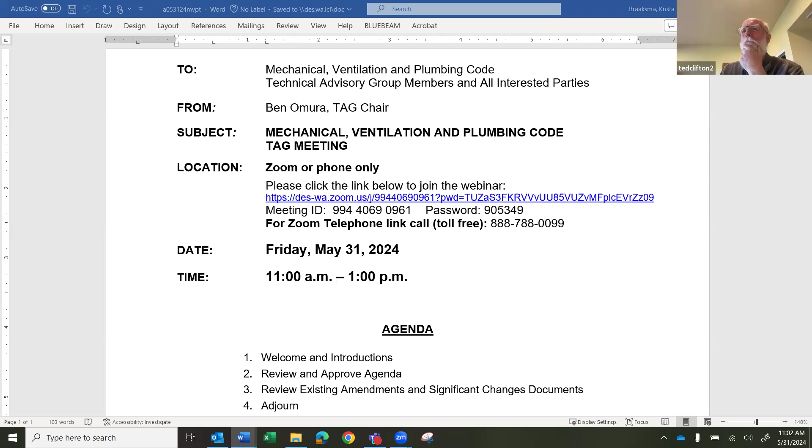Great, thank you. I appreciate you volunteering your time for this, and I think it's going to be super helpful. Just to maybe say it, though it doesn't need to be said, you're representing home builders on the TAG, correct?

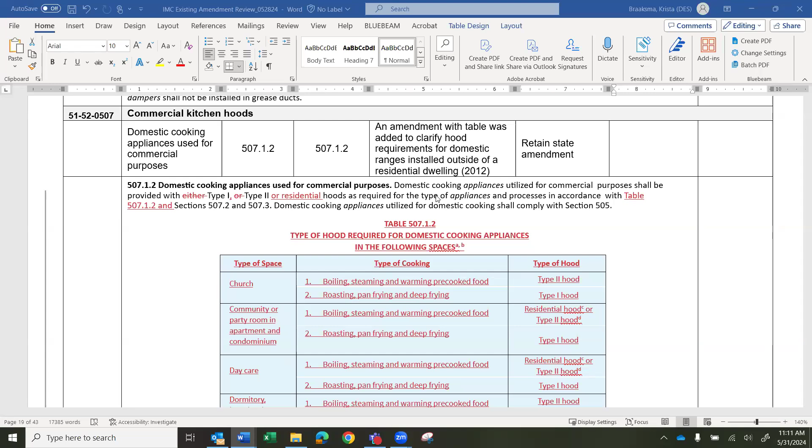Okay, this next one adds a table just specifying what type of hood you would need with a domestic appliance in various occupancies based on what's being done. And yeah, this has been around for a while.

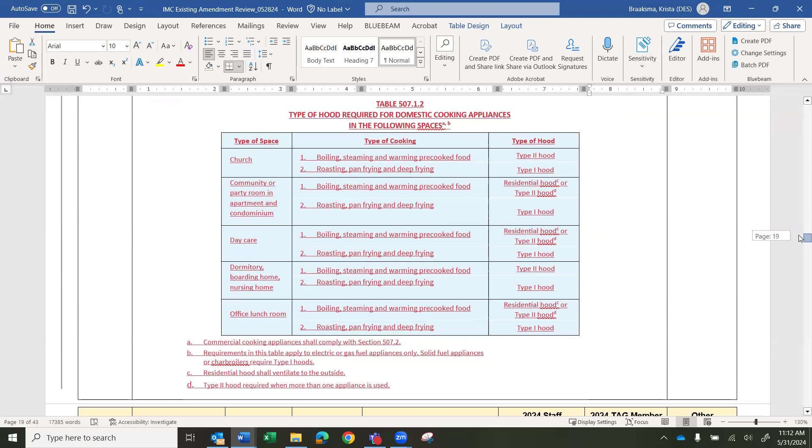Anyone have any items to discuss for this section? Or any other points to discuss for this area or how it's being applied? Is there a clear pathway for defining residential versus commercial, or have I just not seen that? So that we don't get into what is what in the field.

I believe there is, I don't know if anyone has the references off the top of their head, but I believe it's defined somewhere in the section. So you have the domestic cooking appliances defined in section 505, as noted in the last sentence of the paragraph before the table, and that will define domestic cooking and how they're utilized. This is really to define what type of hood is needed for those appliances used in a commercial setting.

And I know this definitely gets weedy. There's also a difference in the capture efficiencies required between a gas and electric, so there's a lot of nuances. Perhaps not so much on the commercial side, but on the residential side, there's also this change in what you need to do for makeup air when you hit 400 CFM, and it could be confusing, I think.

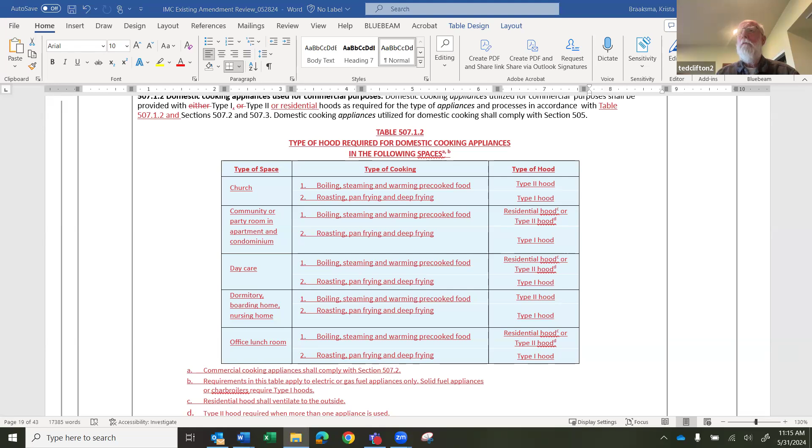Krista, would you be able to pull that section up? Yeah, that's what I'm trying to get to here. Sorry, guys, I didn't mean to take us into the weeds on this. I just know that I've come across that on the residential side regarding capture efficiencies, hood designs, type 1, type 2.

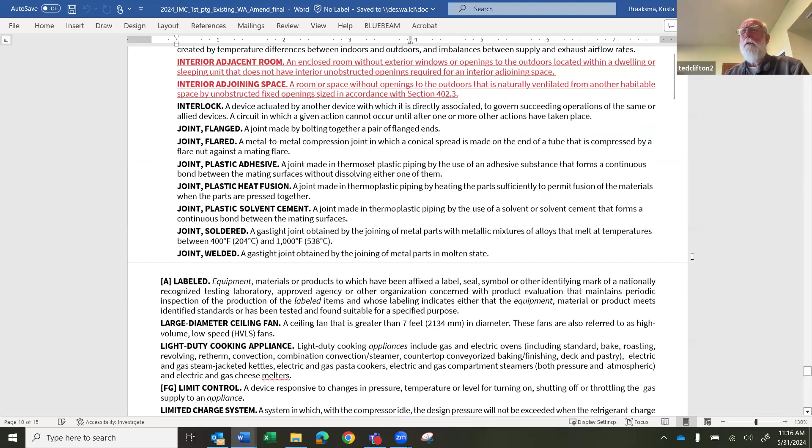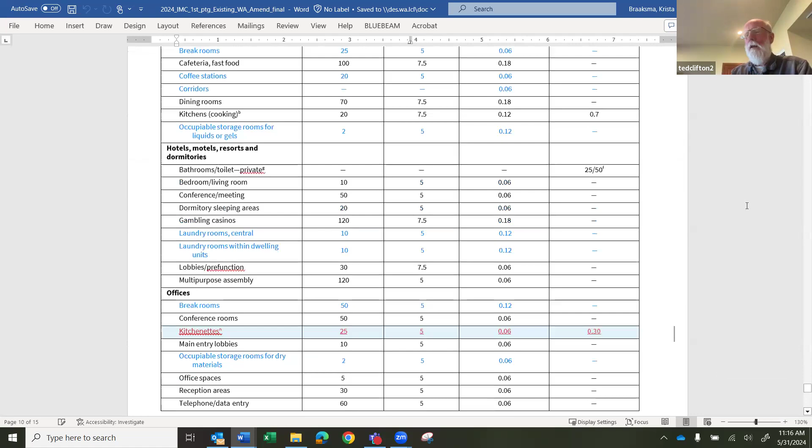Yeah, and on the residential side, like in chapter 4, there definitely is some more clarity on the amount of exhaust and makeup air required for the different appliance types. Right, right. I think what's intended in this section we're looking at is that type 1 and type 2 have to do with fire suppression or fire protection requirements, as opposed to other ventilation issues, and it's not clear in that language.

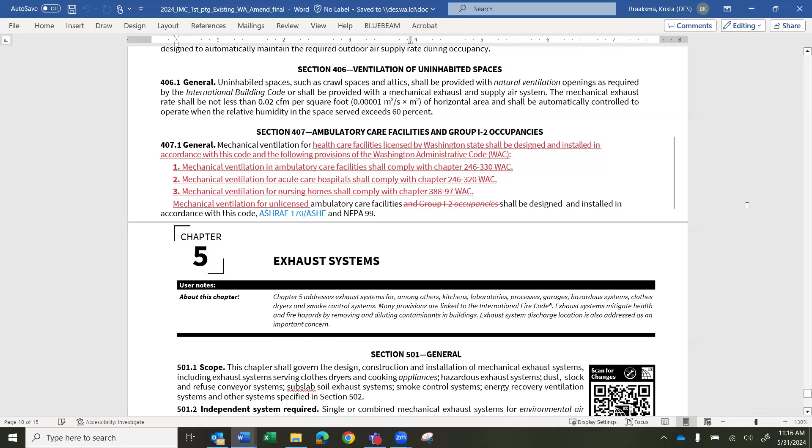Well, then the other thing is when you look at that selection area where both are acceptable, you run into a situation where, if there's a fire event, a residential hood does not have a fire suppression strategy, while a commercial or type 1 would. So how do you differentiate, for example, a child care facility where you're boiling water? How do you define that?

Again, I'm just trying to eliminate the confusion in the field that occurs, and then we get all this pushback from.

So that's exhaust ducts. Let's look here. I mean, 505.2 gets into equipment. So it's got to have the UL 507. That's no problem. Apply with UL 507. Domestic cooking, which is residential.

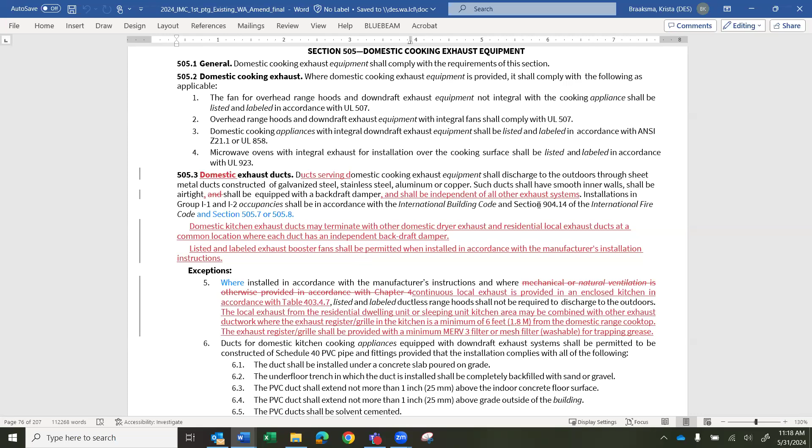So it doesn't refer to the type 2, or—no, it wouldn't, because this is residential. That would be in 507 for the type 1 and type 2.

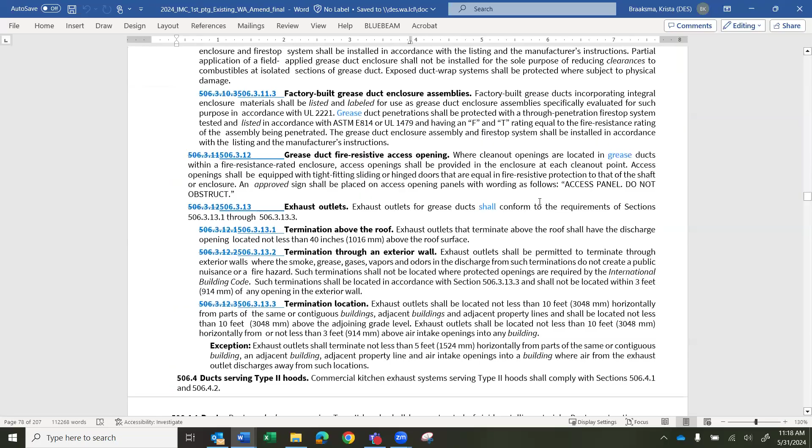If the wattage is over 6 kW, then do we recommend a type 2? Well, I guess the question, maybe we could, if there's a way to define a threshold, right? Is there a way to define a threshold where it migrates from type 1 to type 2, or residential to type 2? Well, type 1 and type 2 depends on grease and smoke.

And anything other than that. Okay. All right, well, my apologies. I don't want to get us into the weeds on this. I just—

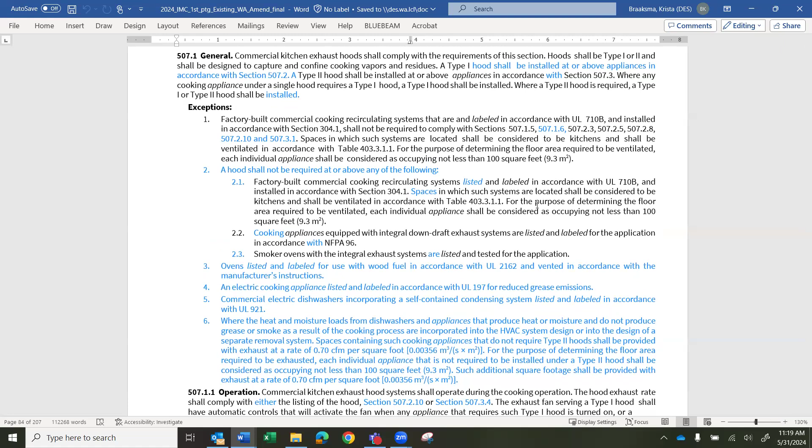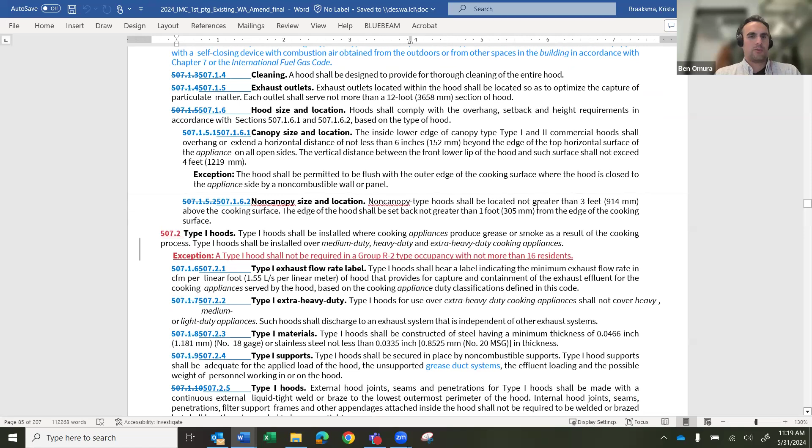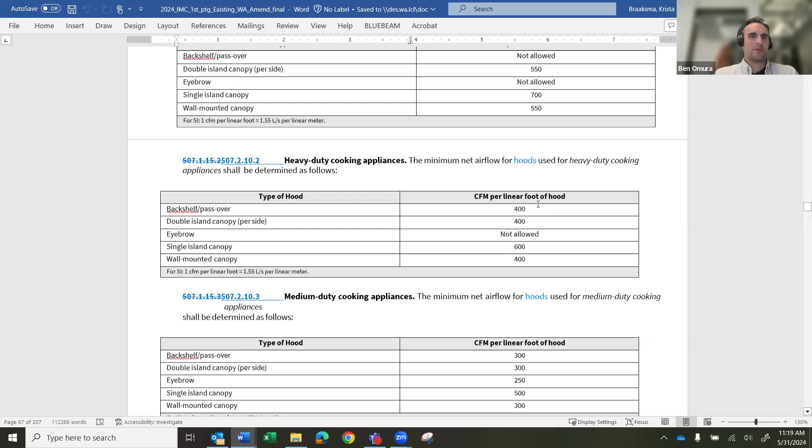Well, and it's definitely something that, if there's a good approach to make a change in the future, we can definitely, as working through the tag process, look at future code proposals as part of this. And we can always today take action to retain, like recommending retaining the state amendment, and then look toward the future to make additional modifications. So it's not something we need to—this isn't our last chance to improve the code or modify it, if it makes sense.

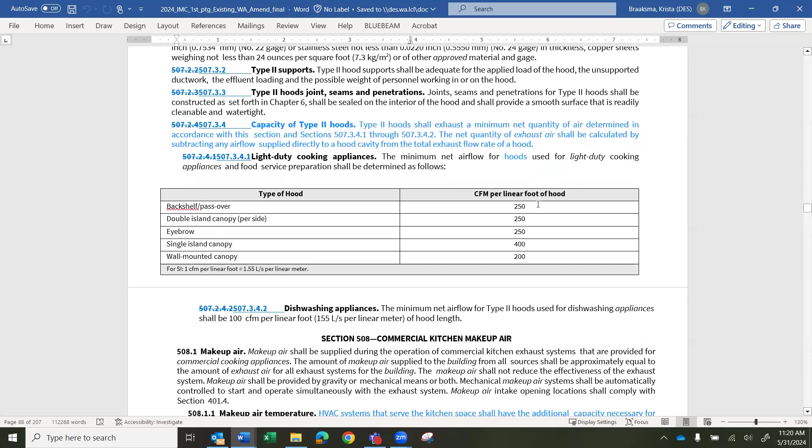And as far as getting into the weeds, this is a code tag after all, so I figure we're going to get into the topsoil. I mean, this is about as nerdy as it gets, right? Yeah, that is the purpose of what we're doing, is to nerd out on this stuff.

So yeah, and I'll definitely say, on the other perspective, not having this table—Oregon doesn't have this table—it's really up to the AHJ for every project to determine what you're doing there. And the requirement is just to put up a sign that says you can't do anything except boil water if you're going to use a residential hood, or a type 1 or type 2 hood rather. So it's helpful here to just get that up front, I think.

I'll just chime in on this table. So, this is the commercial code we're dealing with. And these types of spaces—church and mainly these amenity community rooms—oftentimes in the past you'll see the client and the architect specifying a residential hood to put into these spaces. So this table has been helpful to point out to the client that, just because they're putting in a residential hood, depending on the processes happening in those amenity spaces, they may be forced into needing a type 1 hood. So anyway, I just thought I would chime in—I definitely support retaining this existing state amendment, this table.

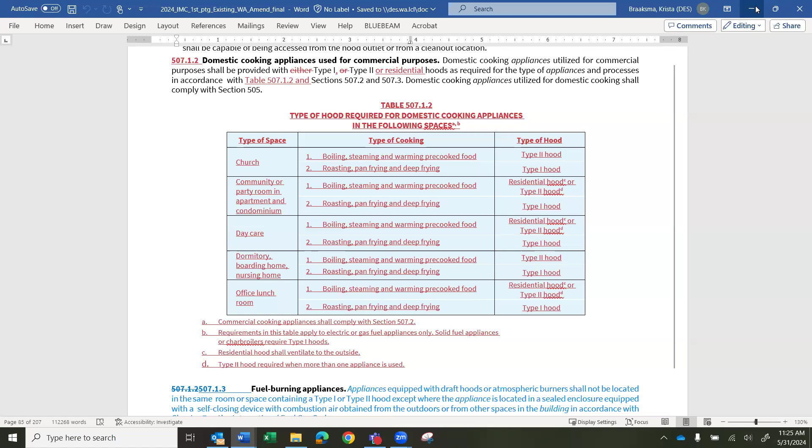Actually, okay, that makes sense. If you look at sub sentence A down there, commercial cooking appliances, they define that as commercial cooking appliances. So that's true. Okay, I'm good with that. I mean, that makes sense too.

I think if some of you want to take this offline and look at it a little bit deeper, that would be awesome to do. So if anyone wants to volunteer to form a small working group to look at this further, we could move today to retain the existing amendment and then work on some proposed changes for future meetings.

Okay, I'll make a motion to retain it. We can have a different motion to do something else. I'll second the motion. I need to read out the numbers though, and they're gone now. Yeah, I'm trying to get back there. Sorry, I just brought up the wrong document. Hang on.

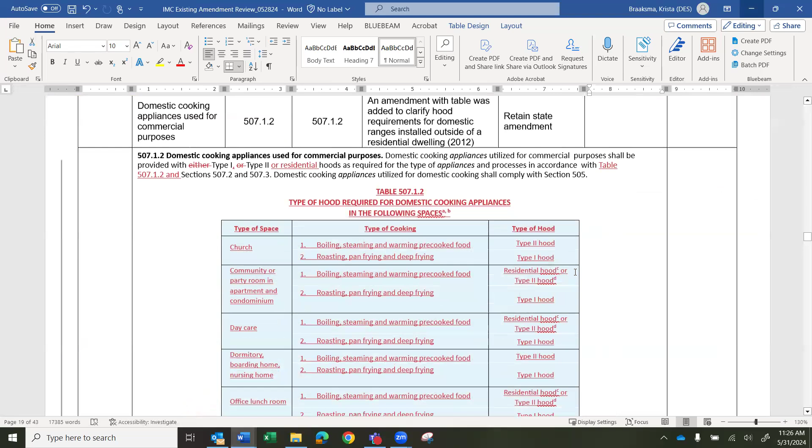Okay, so a motion to retain existing amendments to section 507.1.2. I'll second the motion. All right, there's a motion and a second. Any additional discussion? All right, so the motion is to retain existing state amendments to section 507.1.2. I assume that includes the table, Krista? Yes. Okay, all right, all in favor, please say aye. Aye. Any opposed? All right.

And then I think, Shailesh, you kind of hinted at this, but Seattle has some additional definitions on some of this stuff that if anyone's looking at this would be maybe helpful to reference, and you might have some experience with how that language got developed as well, or how it's being used at least.

We added a note for 6 kW as a total. When it is higher input, then we definitely wanted a type 2 hood. Yeah, Seattle has an additional table for a bunch of this stuff, but it's for commercial cooking appliances. I think there's a little bit more granularity if you look at the Seattle City Code.

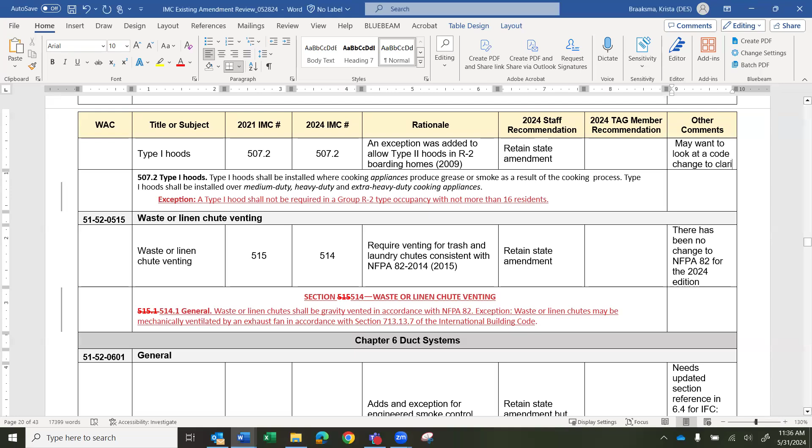Well, I mean, let's keep it. It's all good. And can our recommendation include the desire, or other comments to say... yeah, there you go. How's that? Great.

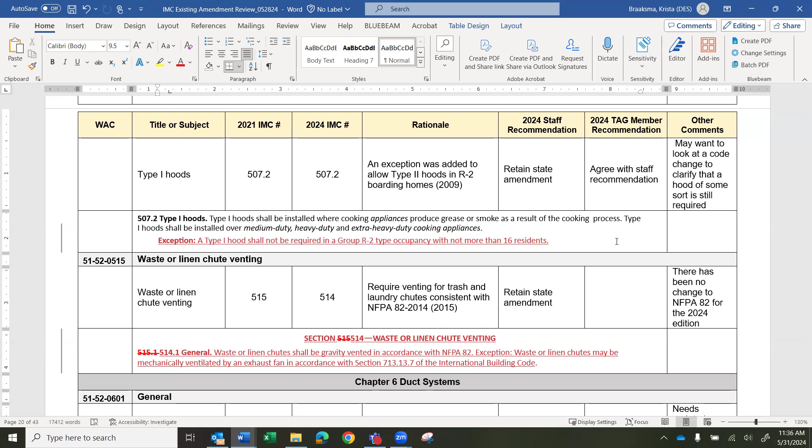Make the motion to retain existing state amendment for section 507.2. I'll second that. All right, so motion is seconded. Ted, did you have any comments on that? Yes, can we discuss for just a minute?

I was noticing that this exception is phrased in the negative. And if we simply turned it around and phrased it in the positive, we could say a type 2 hood can be permitted in a group R2 occupancy with not more than 16 residents. So it's not changing the nature, it's merely changing it from negative wording to positive wording.

I think it's still potentially changing the requirement because, Krista, you just scrolled up to the table - boarding home is one of the categories here. And if you're in the first type of cooking for boiling, steaming, or warming, it would be type 2. And then, roasting, pan frying, there's a conflict here - I'm actually noticing a conflict between that table and this exception.

So I guess, Krista, in that case, if we're noticing that there's some conflicting amendments right now, do you think it would make more sense to potentially not retain this and revise it? Or do you think that would still require a code change proposal?

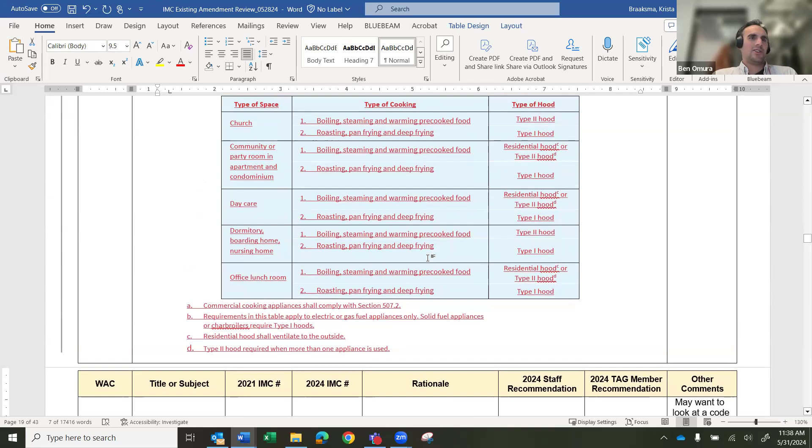Maybe it's not a conflict because this is giving you more of... so the exception to 507.2 is requiring a Type 1 hood shall not be required in Group R2 with not more than 16 residents. And then the table in 507.1.2 is requiring Type 1 for like grease producing cooking or smoke, assuming it's R2 occupancy.

I read that as this exception just giving more information. So maybe, kind of back to Ted's comment, this might be using the table as well as this exception together to get the full definition of what's required for that type of space.

So there's a motion on the table. I want to make sure we're honoring that. So, any other discussion?

I was just looking at the R2 and the residents, and in the building code, an R2 boarding house is 16 or more residents. So technically there is no R2 that would have less than 16 residents. It's a Group R3 that has less than 16 residents. Does that make sense?

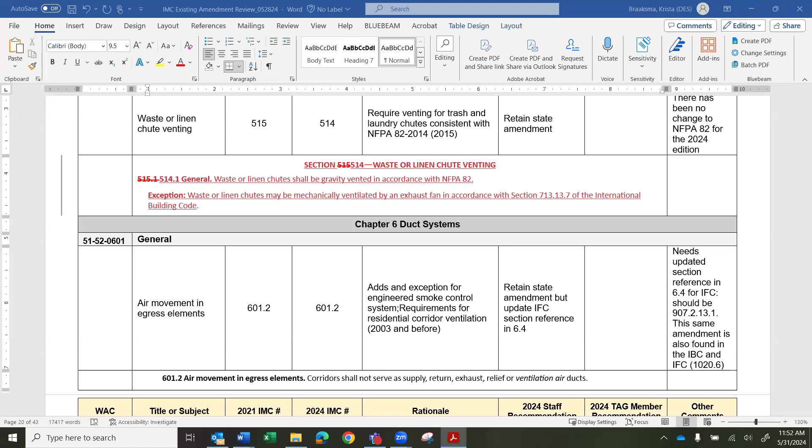Well, I think we can still have a motion because we can still discuss. So I'll make a motion to accept the amendment, in this case to section 514. Is that correct? Yeah, that's what I'm trying to say. I'll second the motion.

Motion and second to retain changes, state amendment to add section, I guess now 514. Any discussion on this section? Okay, all those in favor of retaining the state amendment, please say aye. Aye. Any opposed?

Thank you. And then I was trying to find, Krista, the building code amendments, but it looks - since this section changed, I know the building code language references 515, so I'm assuming that'll get updated to 514 on the building code side. Yeah, I'll coordinate with Dustin to get that done.

Okay, awesome. All right, made it through chapter 5. And this is a long-standing exception that's in the building code, the fire code, and mechanical code.

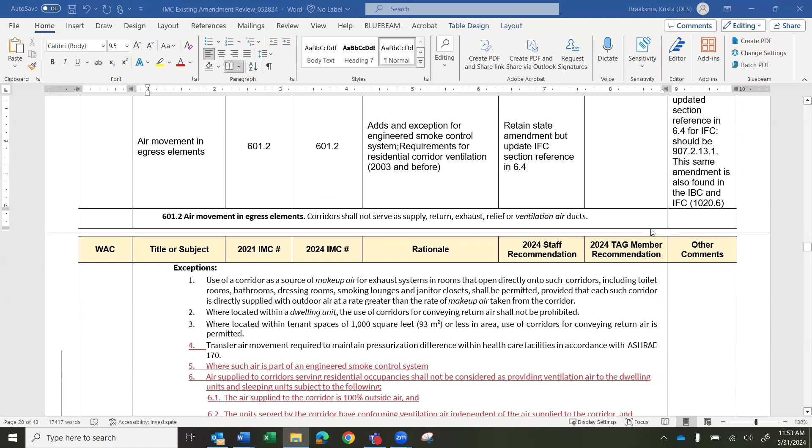And this one I did double check the reference in the IFC and updated that.

I guess, was there, I forgot how we were handling references to other code. Are we still identifying them as International Fire Code and not Washington State Fire Code, or International Fire Code with Washington amendments or anything? We don't, as far as I'm aware. We're still calling it the International Fire Code.

Sometimes we have amendments, sometimes we don't, so it's just cleaner to. Yeah, maybe just the energy code or something like that that we treat differently.

Great. Any discussion on this section? This is, I guess, if we want to go back up to that, this section is kind of around the requirements for air within egress areas and the lengthy number of exceptions to allow for some cases of that.

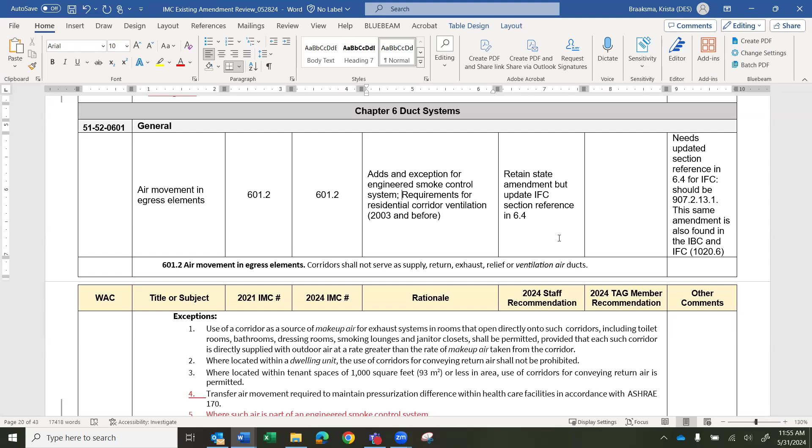I mean, it's a good set of exceptions because for residential high rise, you do want to put in 100% outside air to pressurize that corridor. Some of that is going to leak under the door into the unit, but it's not intended to be ventilation, it's intended to be pressurization, so.

I do need to chime in and state that further in the mechanical code for ventilation purposes for R2 designations, 60% or more efficient ERVs are required. And so part of the venting strategy should not be undercutting doors and such.

True. Yeah, and 6.2 indicates that the units have to have independent conforming ventilation air, so be that an ERV or whatever.

Yeah, this is just primarily for smoke in a corridor, right? You want to ventilate with fresh air so that if there's a tenant space that's creating the smoke, it doesn't draft into that corridor, which then conflicts your occupants trying to escape the location. So it wants fresh air from outside driving in there, pushing in towards the tenant spaces.

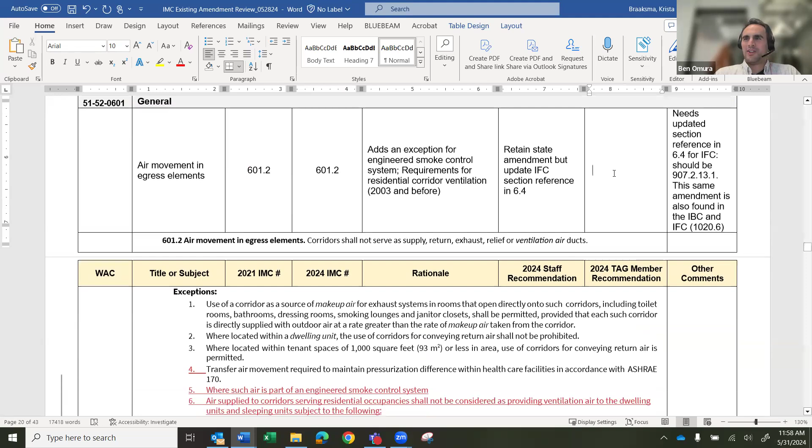All right, cool. Any other discussion on this section? I mean, yeah, I would agree with the discourse here, and item 6 is almost not an exception. It's more of a clarification to the application, I would say. But yeah, so I don't know if anyone wants to offer a motion to retain this section, or if we want to look at other action.

What was that? Sorry, was that you, Justin? Correct, so moved. Can you, Krista, can Justin offer a motion? Sorry, Justin. Motion to retain. I'll second it.

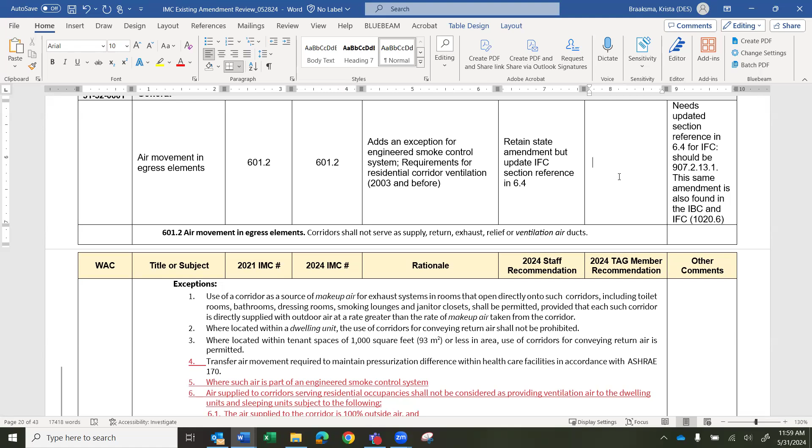Typically, if he's considered an ex officio member, ex officios can make motions, but okay. Yeah, I'm good with that. Yeah.

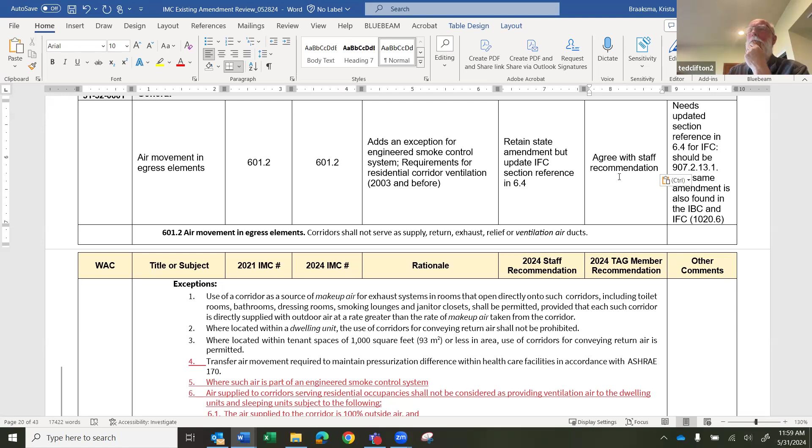All right. Motion and second to retain existing amendments to 601.2. Any additional discussion? All right, hearing none. All those in favor, please say aye. Aye. Any opposed? All right, thank you.

And I don't know, could you pull up the 2021 Washington language? 2021. Yeah, I have it pulled up. It obviously reads differently. Is this?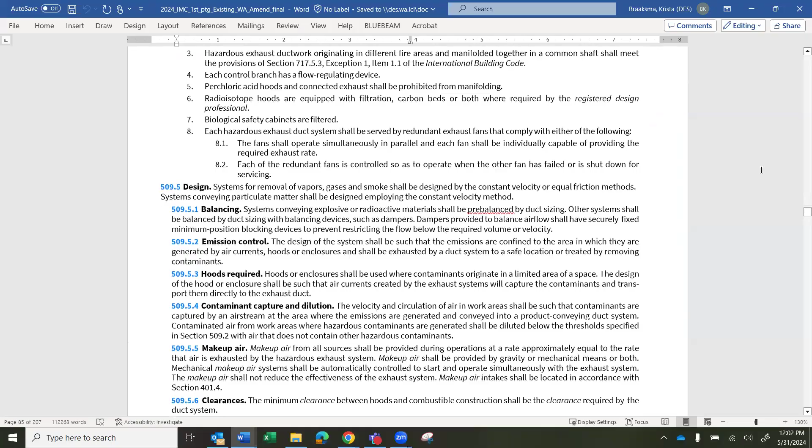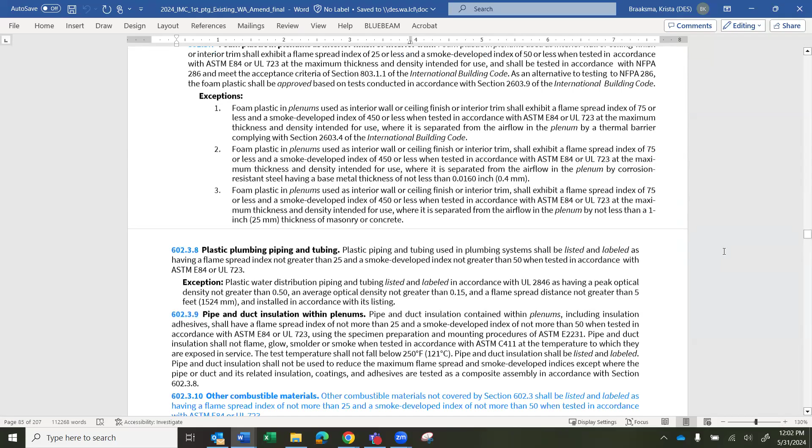So 2.1, there you go. Yeah, let me pull up... this is the secret working draft. So, 602. It looks identical, but you can see the...

Like Ted said, fuel-fired appliances not installed within a plenum is moved to 602.1.3. And then the previous state amendment for air systems that serve multiple fire areas is added there. So this is the only portion that's the actual state amendment. The rest were changes between the 2021 and 2024 edition.

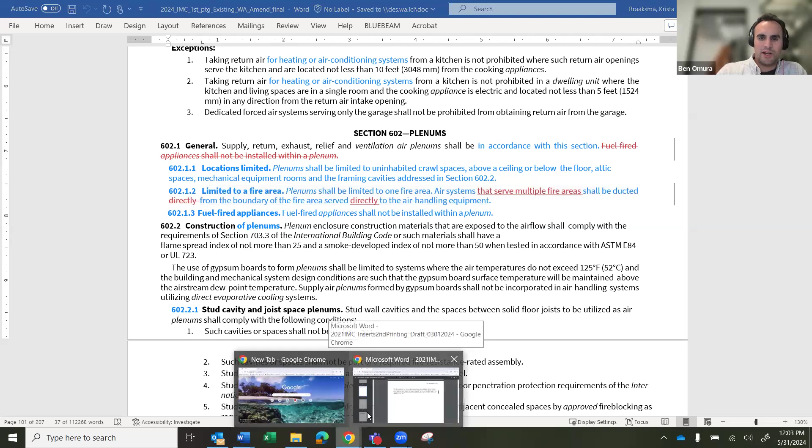Was there, looking and comparing it, a change to the first subsection in the old language? I saw it doesn't look like we had the framing cavities. I don't know if that was part of the model code previously.

Let's do it this way. Yeah, it looks like there might have been an existing state amendment to have stricken that framing cavities item and make the last item mechanical equipment rooms. Oh, man.

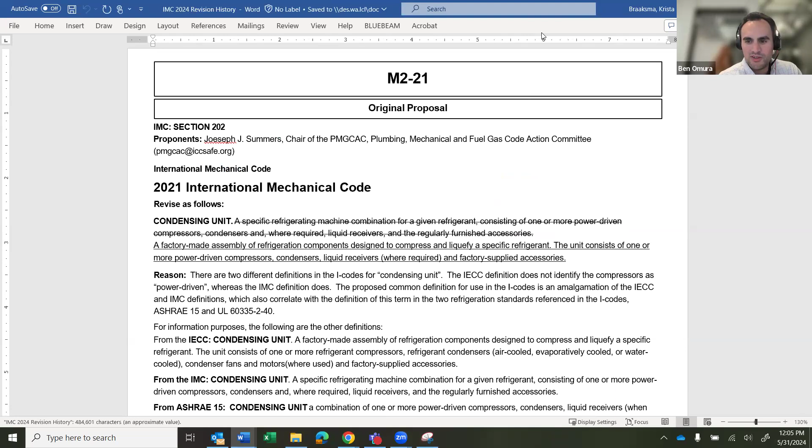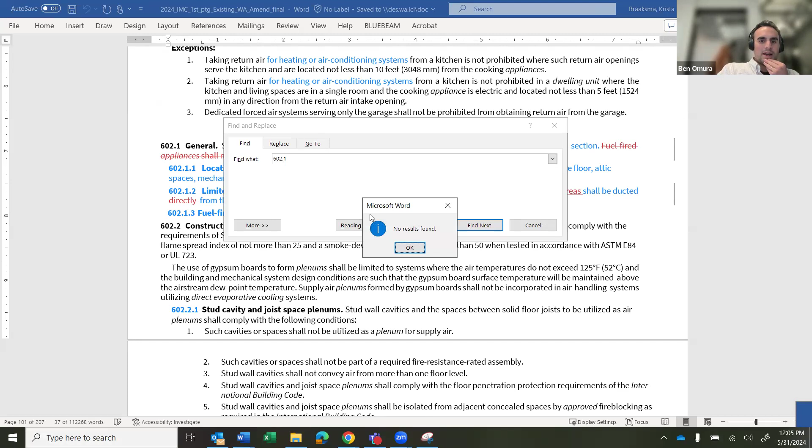So I guess to clarify, my understanding is that in what Krista has clipped in there for the existing 2021 state language for this section, the first sentence identifies plenums as being crawl spaces, areas above a ceiling or below the floor, attic spaces, and mechanical rooms, but not framing cavities as is in the model code. So I believe that must have been an existing state amendment to have stricken out framing cavities from being classified as a plenum.

And then I think there, you'd move the 'and' before mechanical equipment rooms. Yeah, okay. That is my understanding of what is the existing amendment. So then I guess you would have that strike-through in red or something for state amendments.

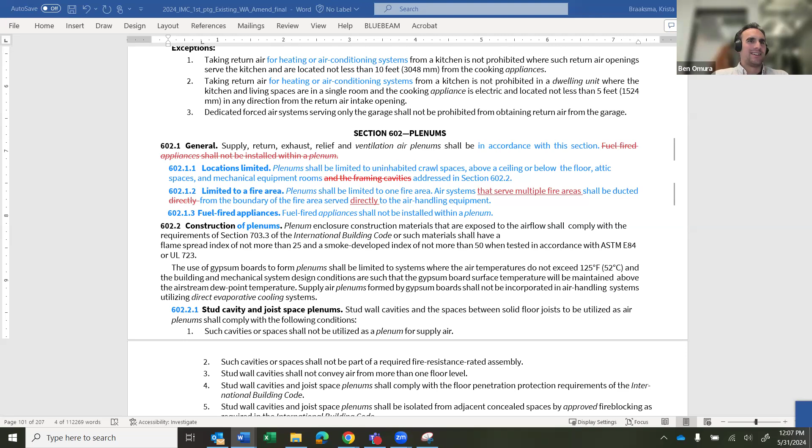All right, okay, thank you, Krista. Sorry. Yeah, I have to make sure this is in the other one too. Yeah. But I guess, okay, so hopefully that's clear for everyone. Hang on, I have somebody at the door.

Okay, thank you. I guess for TAG members or others, any discussion around this section? Sorry, I just want to make sure we got the existing amendments captured, but does that all make sense to everyone?

Has anyone checked to see if the commercial energy code talks about not using plenums? I know the residential energy code says you will not use the cavities as plenums, and it's specifically spelled out in the energy code itself. I am not a commercial energy code expert, however. I am not sure about that, but I don't know if anyone wants to take a look at that, but it would definitely be good to have alignment on it.

Maybe add that to the comment section to remind someone to take a peek. I'm sorry, Jonathan, what am I adding in the comment section? To reference the commercial energy code for not using wall cavities and floor assemblies and such as plenum spaces.

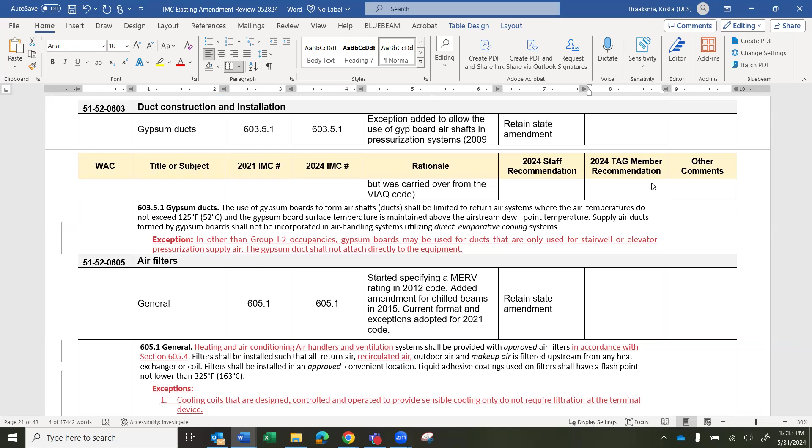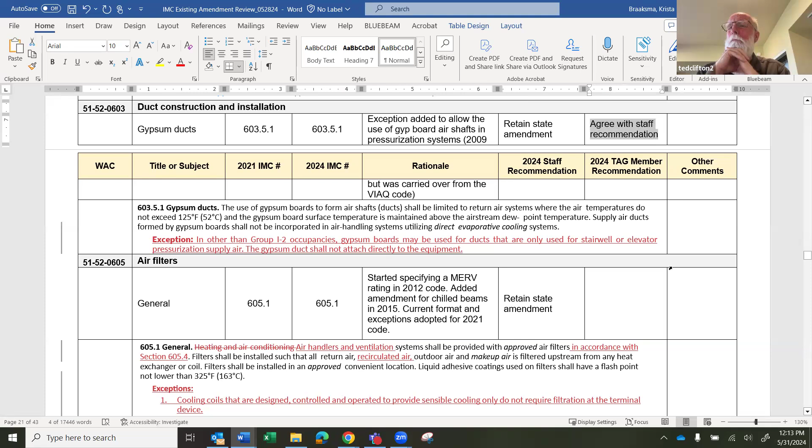All right, anyone want to offer a motion to retain this section? I make a motion to retain the state amendment to section 603.5.1. Second. All right, motion and second. Any additional discussion? All right, so motion is to retain state amendment to 603.5.1. All those in favor, please say aye. Aye. Aye. Aye. Any opposed? Thank you.

Okay, this is mostly from last year's code change. We started, as the note says, specifying a MERV rating in the 2012, and it got very complicated in the 2021 code as we increased the filter capacity for filtering, with all the exceptions that needed to be added into it. So 605.1 and 605.4 kind of go hand in hand.

All right, and is that it? Is there a model code change? Is it just like formatting or something? Or is that just moving exception, model code exception 1 to exception 3? Maybe. Either that, or sometimes Word, when it does automatic numbering, it does weird things.

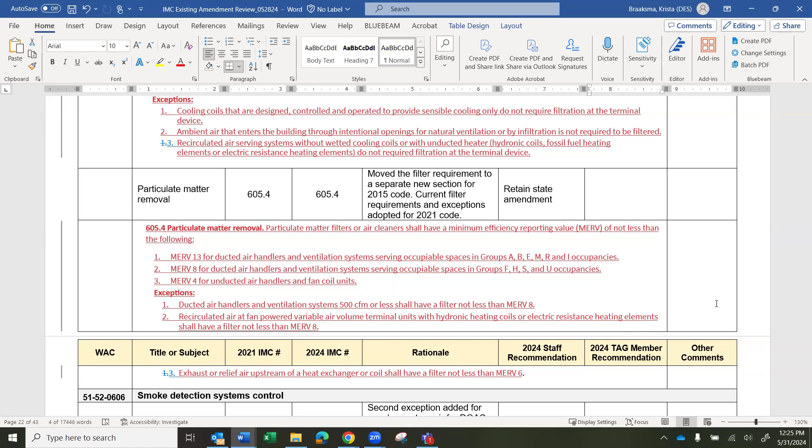This is the commercial code requirement, though. This is not for single family. I'm sorry, I get off my soapbox. Commercial should know better. But yeah, at the same time, if you have like an R2 or something like that with a bunch of affordable housing apartments, this would still be included for that. So those occupants or those building operators would still be subject to meeting these. I'm so sorry, I've just made a speech that was unnecessary.

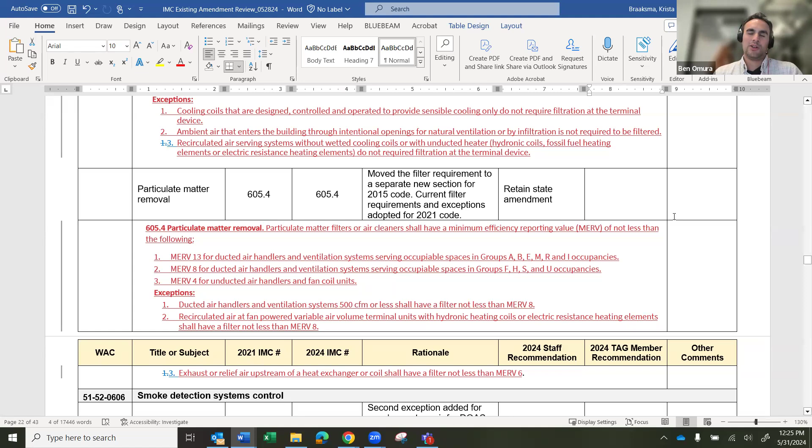No, I think it's good context. And there is in 605.1 there is the requirement that the filter shall be installed in an approved, convenient location. Well, and actually, I think a reason I got onto that was because it talked about occupiable spaces in groups A, B, E, M, and R, and I occupancies. Sure, R being residential. So, my bad.

It does bring up— sorry, go ahead, John.

My only question was, and I believe it's becoming more common to see more of these ERVs and HRVs coming out with the higher filtrations. And the commercial ventilation code does require that an ERV or HRV be installed. So I do think you're going to see more of these filtration units already aligning with products they're putting in. They just have to specify maybe the correct products at the time.

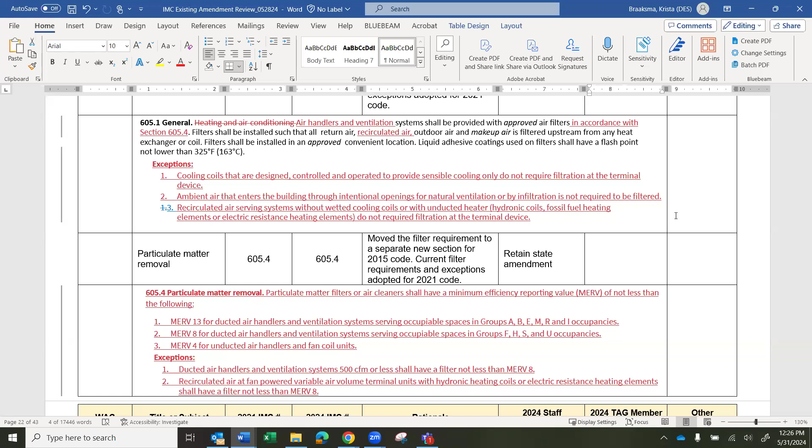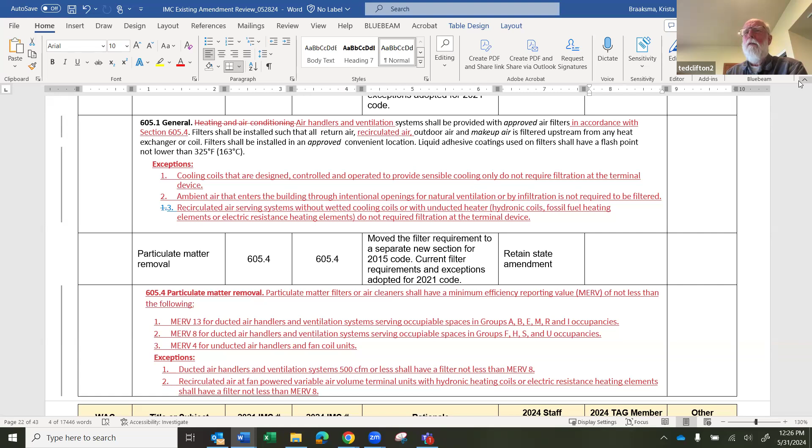California currently already requires all supply air strategies to have a MERV 13, which is one of the reasons we moved to that with all of our products now on supply air. Actually, I take it back—we have one unit that's not a MERV 13, but it's actually moving to the MERV 13. I do think the MERV 13s are becoming more common all over the country. I design all over the country and work with builders and HVAC installers all over the country, and I think the price is starting to come down on them, so hopefully we can use even more of them and make them even more common and get that price down further just by supply and demand.

Well, at the manufacturer level, the price has come down. But if you go to the retail level—I can't speak for all of our wholesale distributors—but at the retail level, you'll still see price breaks on the MERV values or the FPR values, which leads the uneducated buyer to going with less. But you're right, the prices are coming down. When we launched our most recent application, the price was exactly the same for a MERV 13 as it was for a MERV 8, and we just defaulted to the MERV 13.

All right, so far I don't think I've heard any negative discussion on the topic. So maybe I'll go out on a limb and just say, we make a motion to approve this and move on to the next conversation, unless somebody has a reason why we shouldn't. I haven't heard anybody speak up to a no on this just yet—I'm just encouraging moving along for time's sake. All right, I'll second that motion. Motion and a second.

Are we talking about both 605.1 and 605.4, or just 605.1? Well, as was pointed out, they go together—I'd be willing to include in the motion to accept both 605.1 as well as 605.4. Laura, I think you seconded that—is that good with you? I'll second the motion. Sorry, I missed who seconded—was it Ally? I think it was Ally. No worries. All right, motion and second to retain the state amendments for 605.1 and 605.4.

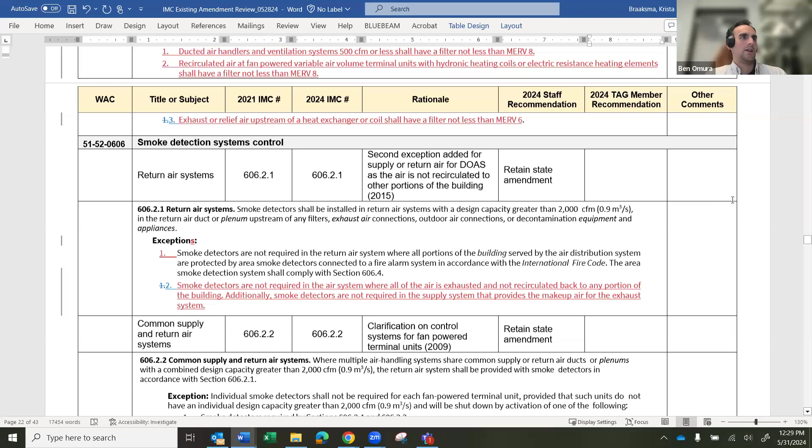Any further discussion? Okay, hearing none. All those in favor, please say aye. Aye. Any opposed? Thank you. All right, excellent discussion, appreciate it. I think that's why we're here, is to get feedback from this diverse group of people. So thank you.

All right, Krista. So for 606.2.1, we added an exception for DOAS systems not requiring smoke detectors if the air is not recirculated.

All right, any discussion on this one? Or does someone want to offer a motion to retain it? So moved.

I did want to interject—both Ian and I were going to drop at 12:30. Does that retain quorum? Yeah, I think thanks, Kevin. I was thinking about looking at that, but yeah, feel free to drop, and then I think we'll just need to do a quick count. We should still have a quorum. We have 12 voting members, so going down to 10 still works. Okay, fantastic, awesome, thank you. Thank you, and I'll see you next time. All right, thanks Kevin, and thanks everyone for joining.

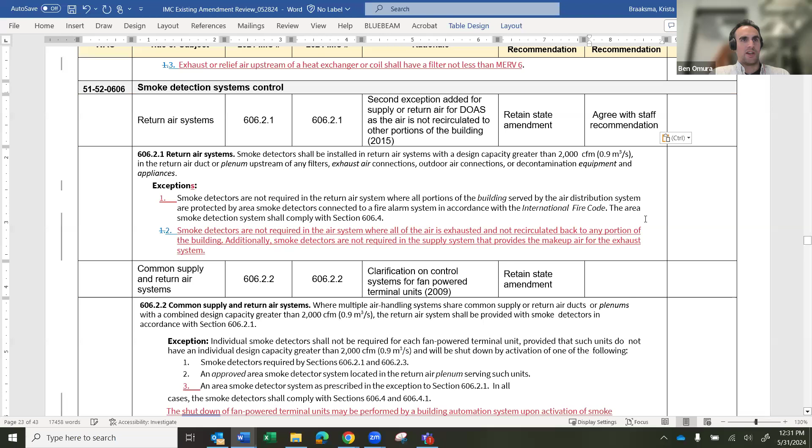Okay, so motion on the table. Is there a second? I'll second it. All right, thank you. So any further discussion on this section? All right, hearing none. All those in favor of retaining the state amendment for 606.2.1, please say aye. Aye. Any opposed? All right, thank you.

606.2.2—they just added some clarification on controls required for fan-powered terminal units.

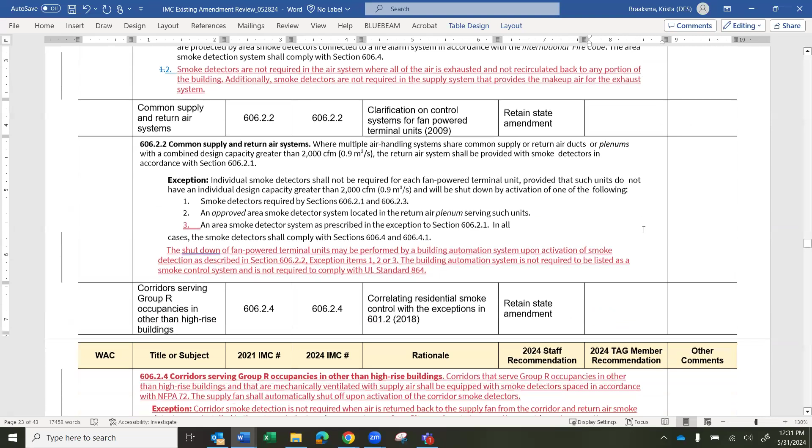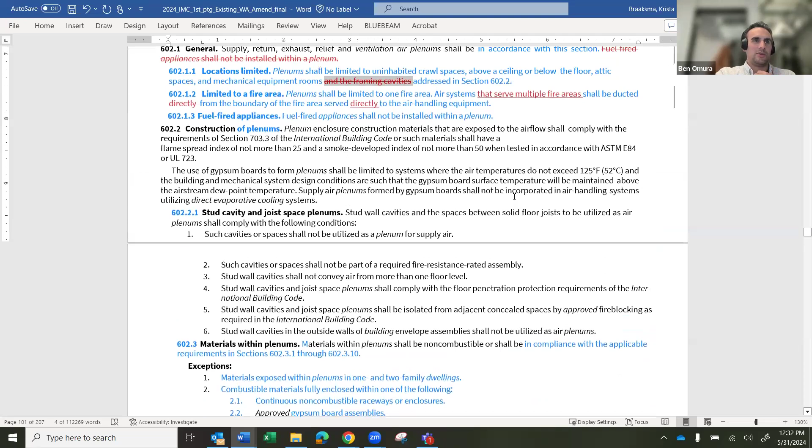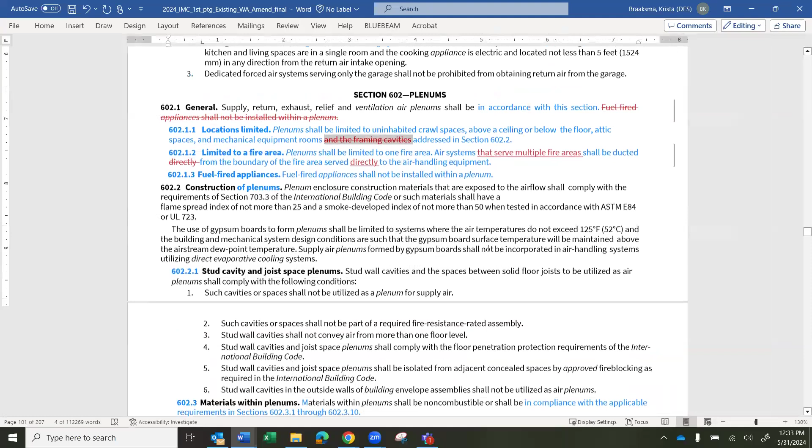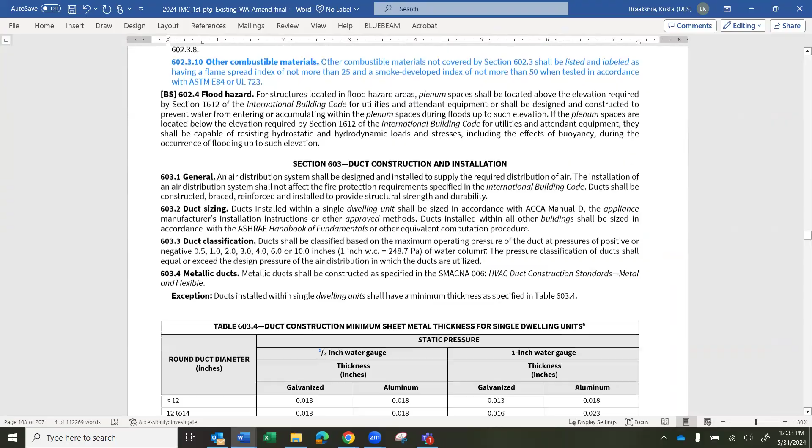And I think there might be some formatting stuff going on here. I think exception 3 ends after 606.2.1, and then 'in all cases' is like a new paragraph outside of the exceptions. Or is it, Krista—do you know if it's under the exception? It's kind of weird in the version I'm looking at. Was that struck out? What was that, Shailesh? Was there something struck out from there? That particular line you had your cursor on—yeah. That's still in 2021 Washington, as far as I can tell. Okay. 606.2—yeah, where is it? 606.2.2. Yeah, still there. Oh yeah, it does need to be a new paragraph. Okay.

All right, okay, so I think that's how it looks. So any discussion for this section, or do you want to move to retain?

Is that shutdown one word or two? It depends on who you ask.

I'll make a motion to retain the existing state amendment for section 606.2.2. I would second that. Motion and second to retain the section. Any further discussion here? Maybe some editorial review is needed, but all right.

All those in favor? We'll do a search through the IMC and see what form of shutdown they prefer.

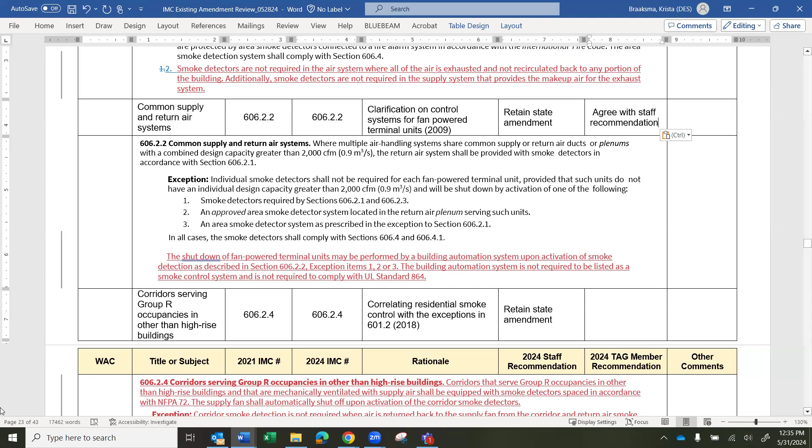And Krista, in the IMC, it's one word. Okay. Thanks, Janice.

Okay, so this is a new section added to correlate smoke control with the exceptions in 601.2.

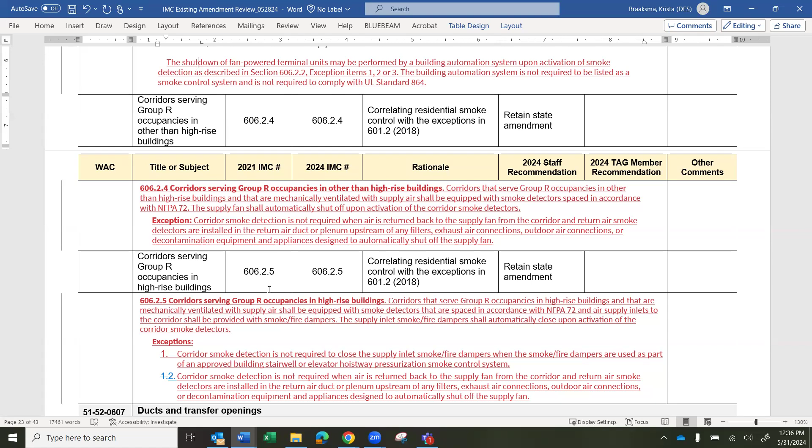And yeah, I think both 606.2.4 and 606.2.5 are mirrored requirements for high rise and other than high rise.

All right, any discussion for these two sections at the moment? Want to offer a motion to retain them for now?

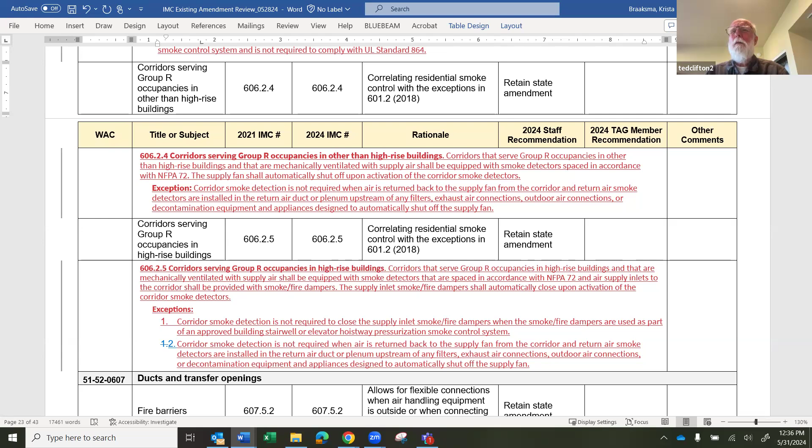I'll make the motion that we retain both 606.2.4 and 606.2.5. Okay. Second. I can second that motion. All right, thank you, motion is seconded.

Any additional discussion for these two sections? Okay, all those in favor of retaining state amendments to 606.2.4 and 606.2.5, please say aye. Aye. Aye. Any opposed? All right.

Okay, so this is a fairly new amendment that allows for flexible connections when air handling equipment is outside or when connecting to a diffuser in the same room.

I think grille is misspelled. Add an extra E. Yeah. Gotta get off of Memorial Day mindset, maybe.

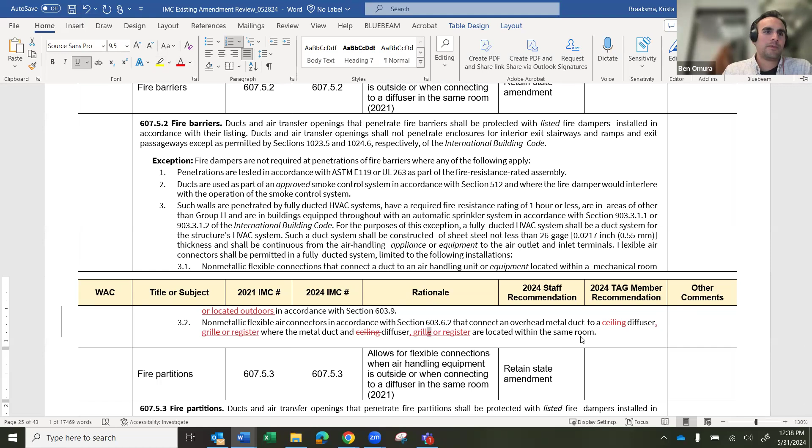So, all right, any additional discussion for this section? Or anyone want to offer a motion to retain?

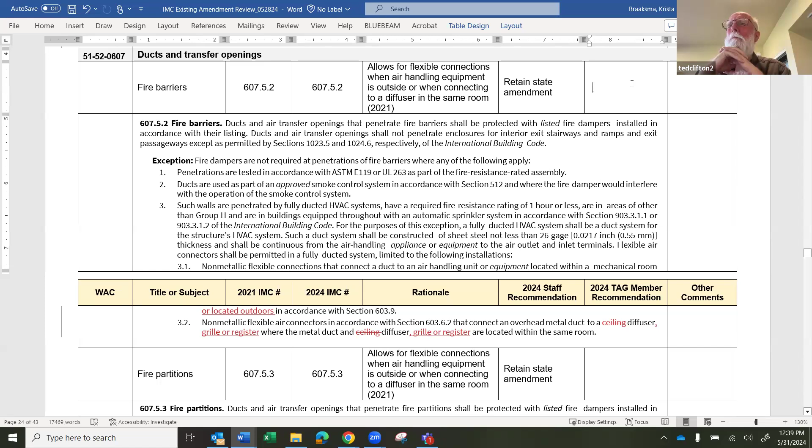So moved. Thank you. Second. Thank you. All right. Motion is seconded to retain state amendments for this section. Any additional discussion?

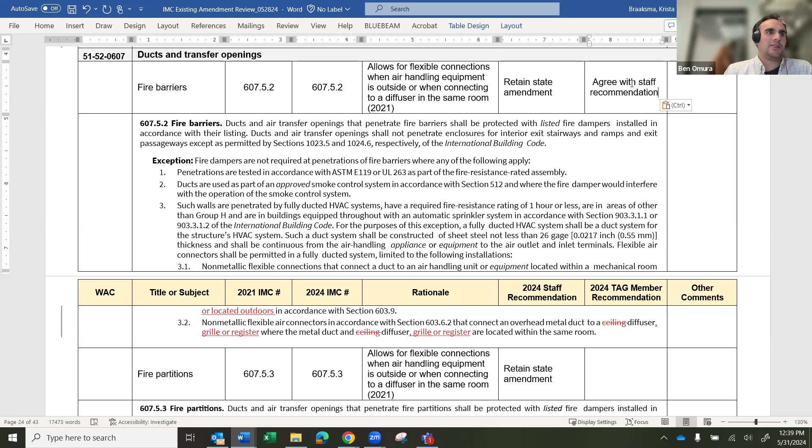All right, hearing none, all those in favor, please say aye to retain state amendments to 607.5.2. Aye. Aye. Any opposed?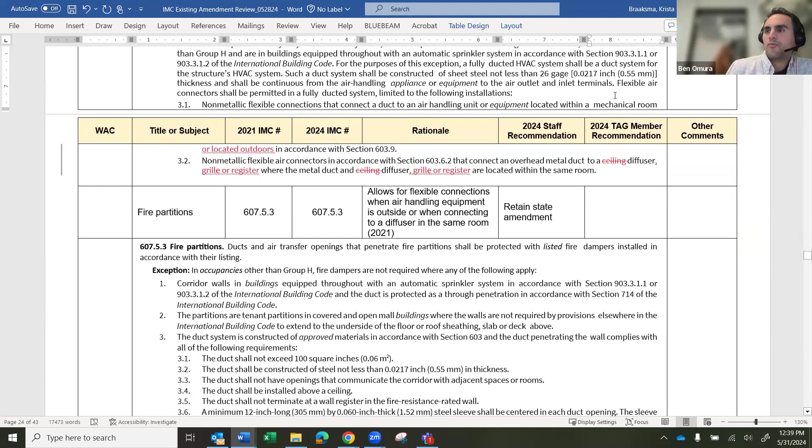Okay, so this one had the same rationale. And grill is actually spelled correctly here.

Of course, and yeah, I guess this one is for fire partitions versus fire barriers in the past, the section before. Yeah.

And it does add the fully ducted requirement to the HVAC systems as well. Okay, but yeah, any additional discussion as people are looking at this for the current state amendment?

So under 3.1, where the duct shall not exceed 100 square inches, are we saying here that anything less than 100 square inches does not require?

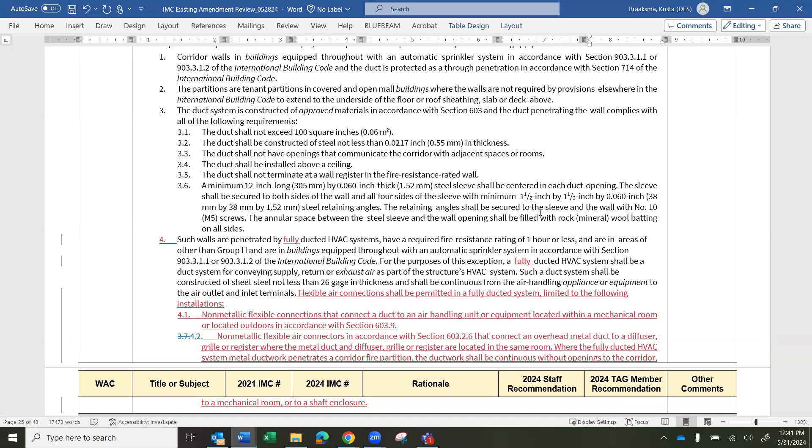So my understanding is that's all under the exception to allow not to use fire dampers. So if you're above 100 square inches, then you wouldn't meet the requirements of exception 3.1, which would then require a fire damper for that penetration.

Yeah, you'd have to meet all of those exceptions, or all of the requirements under 3.1 through 3.6, right, to not have it.

But yeah, you don't have to meet exception 1, 2, 3, and 4. It would be 1, 2, 3, or 4 here.

I think this looks good, and I can make a motion to retain this existing state amendment for section 607.5.3. I'll second that. Thank you. Motion is seconded, any further discussion?

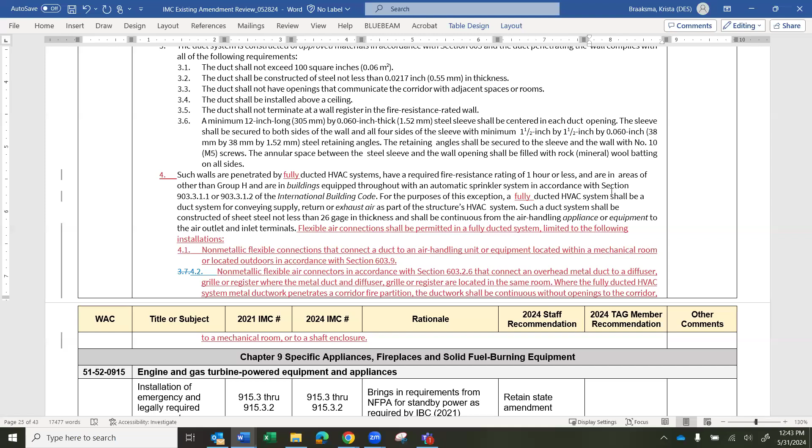All right, hearing none, all those in favor of retaining state amendment to 607.5.3, please say aye. Aye. Aye. Any opposed?

I think that's it for chapter 6. So now we're getting close to the end. All right, chapter 9.

Okay, so this was a new amendment brought in, or both of these sections brought in last time. It was originally just for emergency power, and through discussion, it got expanded out into both emergency and optional standby power systems, just to have some correlating requirements with the IBC, and making sure that all the pertinent NFPA standards are provided.

So I'm noticing under 915.3.2, the air outlets, number 2, the radiator cooling outlet should be located on the exterior of the building. Is this only referring to units that are actually installed inside the building?

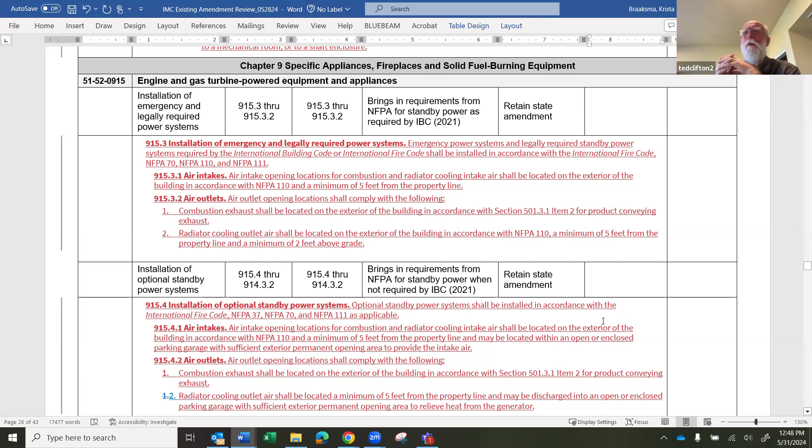Can we see the very bottom of 915.4? Is there more on the next page? No, that is the end of it. Okay, that's it. So yeah, that one doesn't have the 2 foot above grade requirement.

But again, even the other one, I'm aware of buildings required to have standby power that use the same kind of system sitting on the ground. I think the difference between the two is meeting NFPA 110, and I don't know what that standard has within it.

I have it noted. The optional one says it can be installed outside, but the non-optional one doesn't have such language in it.

Yeah, that one doesn't, it's just standby power. So now that we're back to the section, if you actually read their intent, it does talk about being available in an exterior space on 915.4.1, but it does not use that same language on 915.3.1.

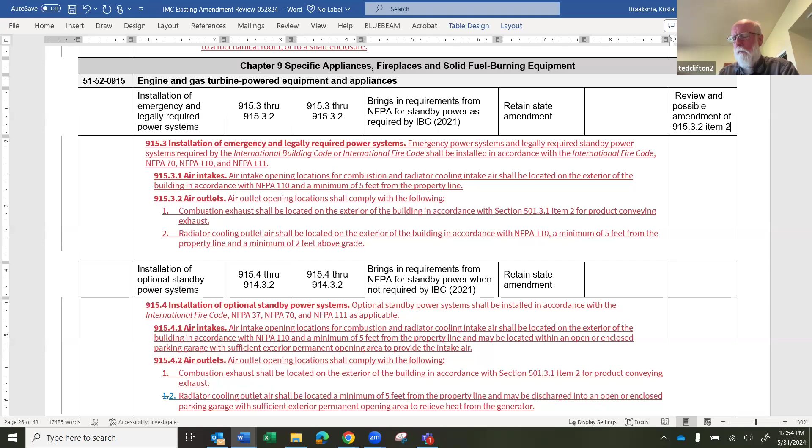So I'm good with the way that it reads. I'm just saying we should definitely make sure we reference those other sections to confirm that it is not a location restriction.

Yeah, I think that makes sense. So, I don't know if there's any other discussion. If we want to make a motion, or if we've tabled other sections in the past, we could bring this up for additional review at the next meeting, if that's what folks would like to do. Open to what the members would like to do here.

I would be happy to. I actually have a meeting with a lot of fire marshals over the next two weeks. I could bring this up with multiple of those guys and see what they say.

Yeah, that'd be great, so I'm going to note you down to help report back. The only caveat being that we need to report back to the MVPE committee by the 7th, that's our deadline. I will get a hold of them much faster then, how's that?

I'm going to steal a snippet of the screen here so I can just send it to them as we speak. All right, perfect. Thank you.

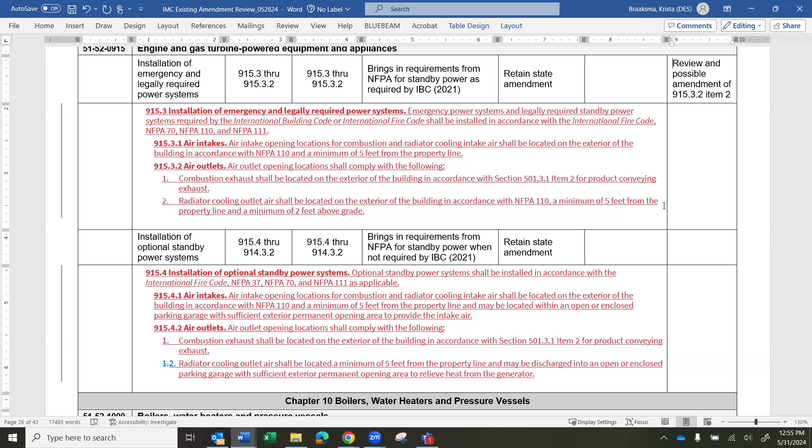Are we looking at tabling this one, or do we just move on to the next section, or does anyone want to make a motion to retain it for today? I'll make a motion to table it, and this would table 915.3 and 915.4 until Jonathan gets back with a clearer definition of NFPA 70, 110, and 111. Is there a second? I'll second that since I'm now responsible for it. Motion and second to table this for additional discussion.

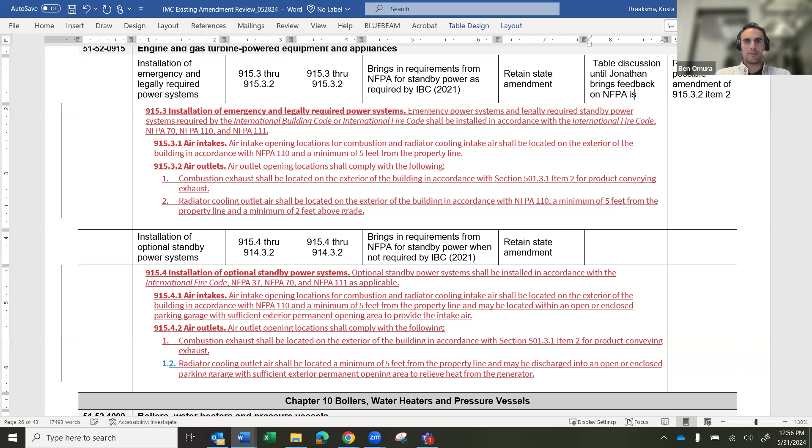Keeping in mind what Krista mentioned regarding the report date. Any additional discussion? All those in favor, please say aye. Aye, aye, aye. Any opposed? Okay.

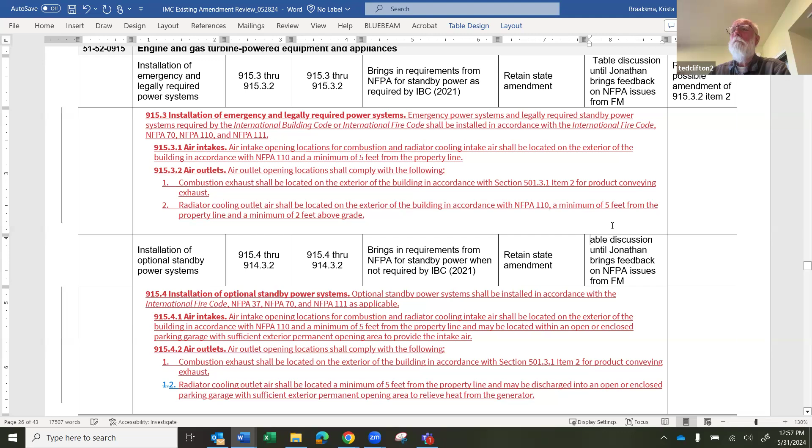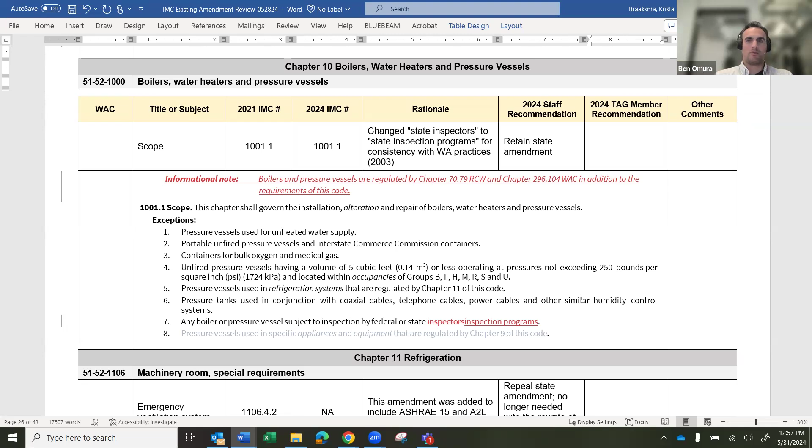We've got three minutes left, and I think we have about half a dozen more sections to look at. Krista, do we need to make a motion to extend, or can we just check with everyone? I don't know what everyone's commitments are, or if we obviously have the model code changes to review as well. So I think we'll still need to have another meeting next week to meet our deadline.

I have to jump off at 1. Okay. Anyone else, any suggestions? Yeah, if we have to have more meetings, it makes sense to just go to the next one. Okay, agreed. So we'll give you back a couple minutes.

When we reconvene, we'll be looking at Chapter 10, as well as the 2024 IMC model code changes. Please take a look at those prior to the meeting, and I look forward to talking with everyone then. I think Krista or Annette will be reaching out to confirm the date for the next meeting, and that will be next week, I'm assuming. Yep, hopefully early on next week.